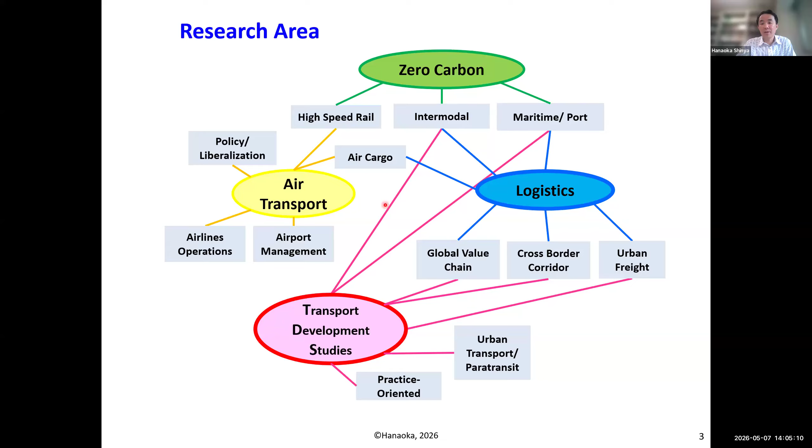My core research topic is logistics and air transport, but I also focus on transportation development studies, meaning developing countries' transport and logistics issues. Today's topic is between zero carbon policy and logistics for intermodal transport, which is research one of my previous master's students has done.

Going to the background: CO2 emissions from the transport sector in Japan are the second largest emission volume, following manufacturing. Manufacturing is top, with transportation accounting for around 20% of CO2 emissions. Among the transportation sector, around 55% is passenger transport, like personal vehicles, other passenger vehicles, passenger rail, and ships, and another 45% is cargo. In total, around 40% of transport emissions are from freight trucks, making trucks one of the major emission sources in transport in Japan.

In freight trucks, the Japanese government more than 20 years ago began considering a modal shift from trucks to freight rail, ships, or air. Air is actually a bit different, but they're mainly considering shifting trucks to rail and ships.

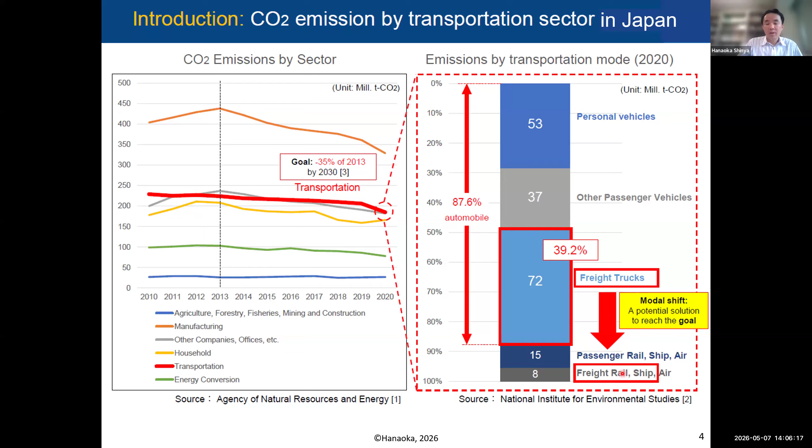Then the recent around 9 years, the statistics. So modal share freight transport in Japan uses two different indicators: tonnage and tonne-kilometers. Tonnage is more than 90%, around 91%, is truck. Railway, waterway, and airway are minor. Tonne-kilometer means about 1 ton transported how many kilometers in total.

By tonne-kilometer, truck is still the majority, but the percentage is around 55 to 57%. Waterway is normally used for longer distance freight transportation, so its share is around 38 to 40%. Railway is still not so popular at 4%, and airway is very negligible.

One interesting trend: tonnage is continuously decreasing, and tonne-kilometer is also decreasing. 2020 was the year of COVID-19, so of course there was a much decline. But after that, tonnage again kept continuously decreasing from 2021 to 2024, while tonne-kilometer has been stable.

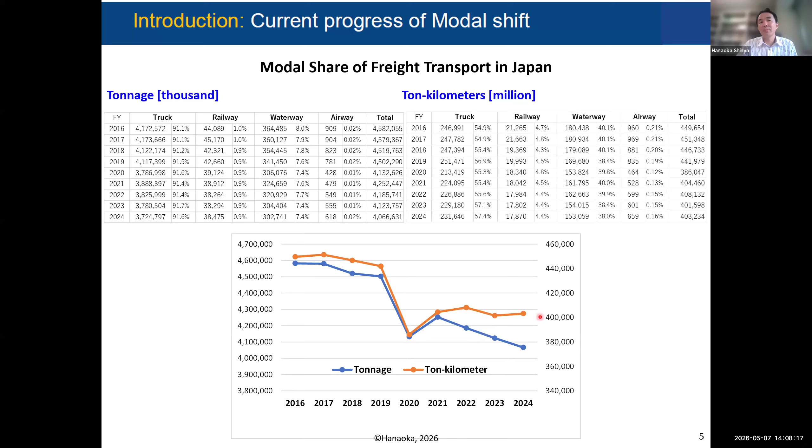Why does this happen? With more e-commerce, small package cargo is drastically increasing in Japan - small size, light cargo. That's why tonnage itself is decreasing, but tonne-kilometer stays stable because small cargo transported by truck over short distances is more frequent. Considering CO2 emissions, we should actually reduce tonne-kilometers, so it's still a serious problem from truck transport emissions.

Then what about the railway freight transport situation in Japan? For tonnage, JR Freight is the major operator, but other private railways also operate. The share of JR Freight is around 89% for container, but carload cargo like coal, limestone, cement, and petroleum - heavy bulk fuel - is different.

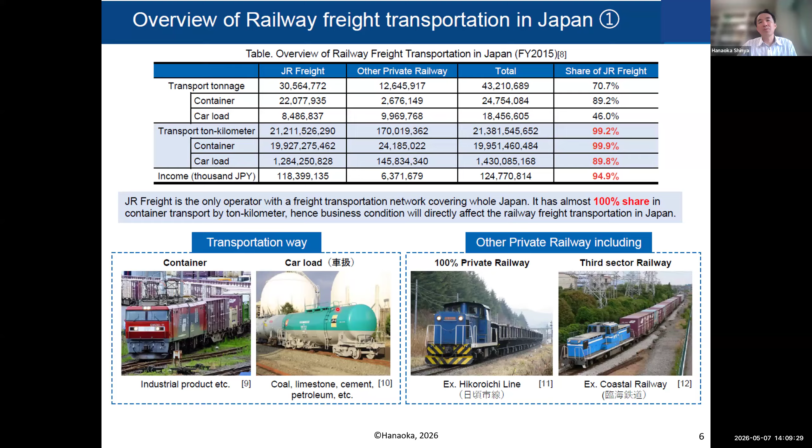That carload cargo can be operated by other private railways. However, on a tonne-kilometer basis, it's almost entirely operated by JR Freight. In some specific locations, for example the Hikoroichi line, they transport coal from a coal area to a factory over a very short distance. So there are some specific companies, but the majority is transported by JR Freight.

JR Freight itself has a problem with its management policy, and before that, also difficulty using services. In Japanese railways, schedules are rigid because passenger railway and cargo railway share the same infrastructure - there is almost no dedicated cargo railway infrastructure. That's why it's difficult to flexibly meet shipper demand, and there's increased risk of damage due to transfer stations or terminals.

Another problem is JR Freight's management policy - they have declining operating revenue. JR Freight has been trying to survive by reducing the scale of its business, becoming smaller and focusing only on urban areas, even though long distance routes connect urban areas. That's why the network scale has been declining, creating a mismatch between shipper needs and railway transportation.

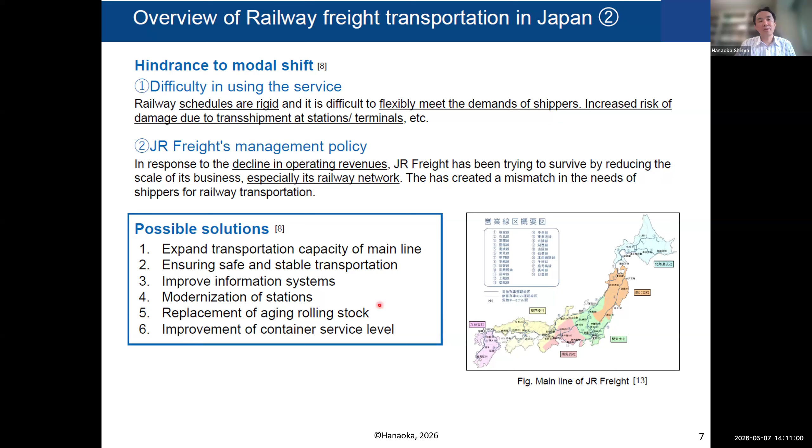The government has proposed some possible solutions: expand capacity, ensure safe and stable transportation, improve information systems, modernization of stations, and replace aging rolling stock and railway infrastructure, then improve container service level. But as shown in the previous slide, railway cargo share is still very low.

What about waterway freight transport? Japan is an island country, so freight transport using domestic sea routes is popular. There is a separation between liner cargo/liner vessel and tramper vessel. Tramper is like high volume monomaterial industry transport, for example iron ore.

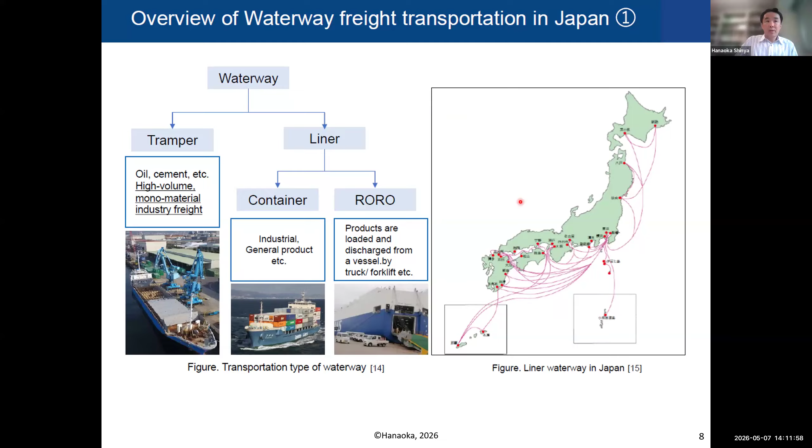For the liner case, container is popular, but actually Roll-on Roll-off (Ro-Ro) shipment is also very popular because they don't need special facilities - vehicles can directly enter the vessel. So Ro-Ro is popular because in the Japanese islands it connects many routes. This is one example of liner waterway transport in Japan.

What about the hindrances or bottlenecks to modal shift? One is competitiveness. Waterway transport is low cost, but on Japanese highways and expressways at nighttime there is a much bigger discount for highway charges. That's why shippers or truck companies still continue to use truck transportation from midnight 0 a.m. until 5 a.m., when they can get much discounted prices. That is one aspect of cost competitiveness, along with seaway, which has a reduction in operating tax.

And then there is also a large number of small businesses.

The industry is dominated by small scale businesses in the shipping company sector. In overseas vessel container services, there are three big shipping companies in Japan, but domestic shipping companies are very small. That's why the number of operators is decreasing year by year due to the extremely weak management base with very little internal accumulation of capital.

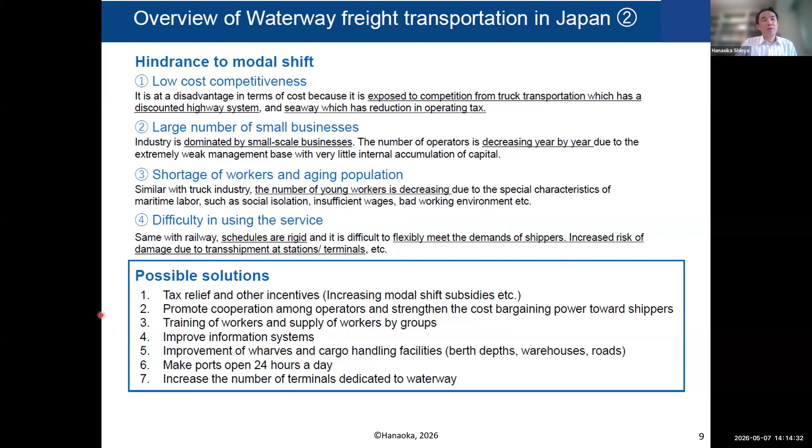In this research, we consider how to reduce CO2 emissions in the transportation sector, following Japanese government policy, because the government set a goal of achieving carbon neutrality by 2050 by using political measures, regulation, and incentives.

So in this research, we can formulate decarbonization policies incorporating a generalized cost function of shipper mode choice, and also a national scale transport network model, and origin-destination analysis for domestic trade in Japan. Then we simulate the overall impact of decarbonization policies on freight volumes and CO2 emission, and then we can evaluate these results.

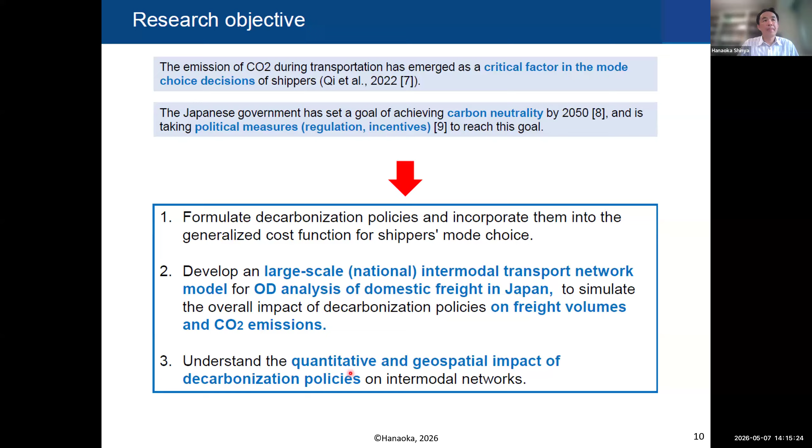This is a very technical matter, so I won't explain the detail, but one point is how to make the average cost. Cost is the main part, the average cost, but we can also consider variance because cost is not always fixed. There are changes in negotiation, that's why the variance of the route cost is also considered.

The cost function has a link for each connection. Link means a connection to a node in the road network or railway network. Node means the station, or in the road case an intersection, and in the inland waterway case a port. So the connection is the link.

In the link function, we can add the CO2 emission cost to the original formulation, which is from another paper. The C means the shipper's consciousness parameter, how conscious shippers are about reducing CO2 emission, because normally shippers just consider cost and time only.

But now, in the current situation, shippers should also consider reducing CO2 emission. That's why we added this consciousness parameter here, along with CO2 emission per ton, per distance, and also price. Price can also flexibly consider the CO2 emission per ton.

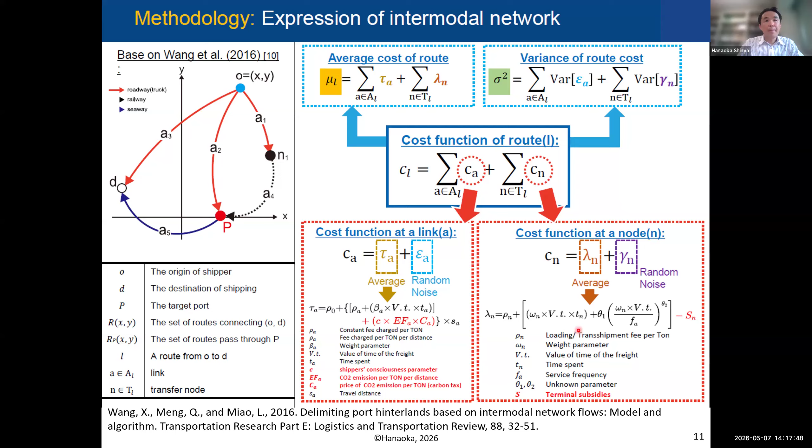For one part of the accuracy consideration, we are using discretization across all of the territory in Japan. Each dot is a shipper's location, and the shipper's location connects to the destination, shown using the roadway, waterway, or railway link.

Using the average cost function and the variance-covariance matrix, we apply a multivariate normal distribution to show port choice probability and the mode choice results. Then finally, we can estimate freight transport by using Monte Carlo simulation.

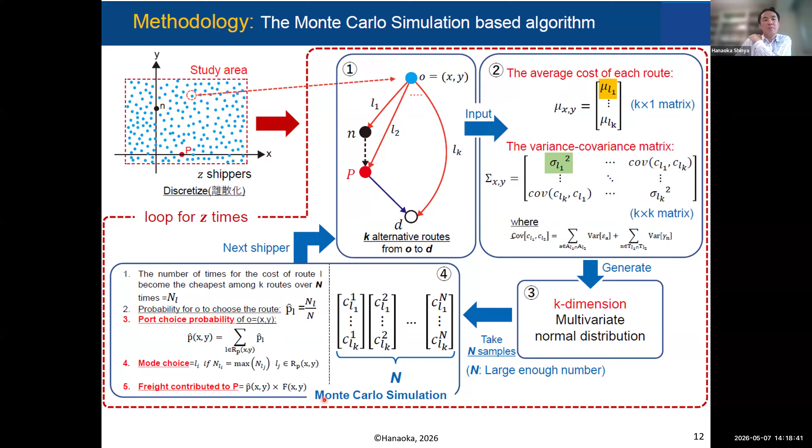One scientific point: if we want to go from an origin to, say, Osaka and Tokyo destinations, they may overlap on the same road. In that case, if we calculate simply, the duplicated area causes an overestimation of the variance. So the variance-covariance structure can reduce such overlapping consideration.

That's why our model is more accurate, giving a more accurate estimation of the transportation cost. This is the scientific characteristic of the model.

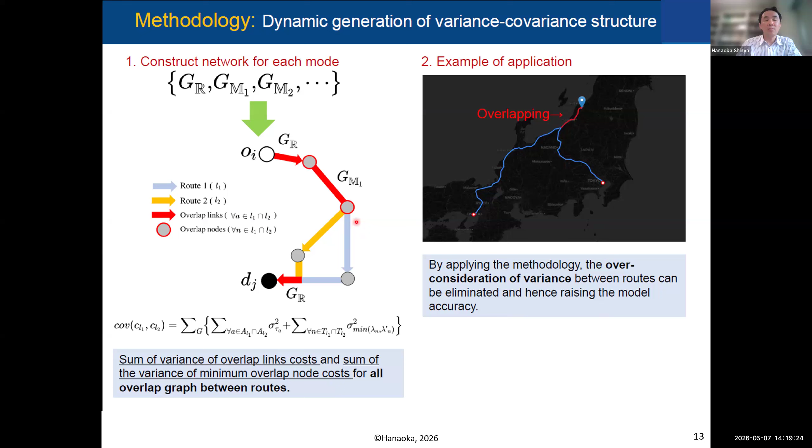Road network, railway network, and waterway network can be made from our existing database. For the waterway particularly, we are separating the types into ro-ro, ferry, container, and tramp, because they have different routes in the sea.

Then we have three scenarios to consider for reducing CO2 emissions. The first scenario is shipper's consciousness, just 5 times the current situation. That 5 was actually arbitrarily decided, to see how we can change shipper's consciousness.

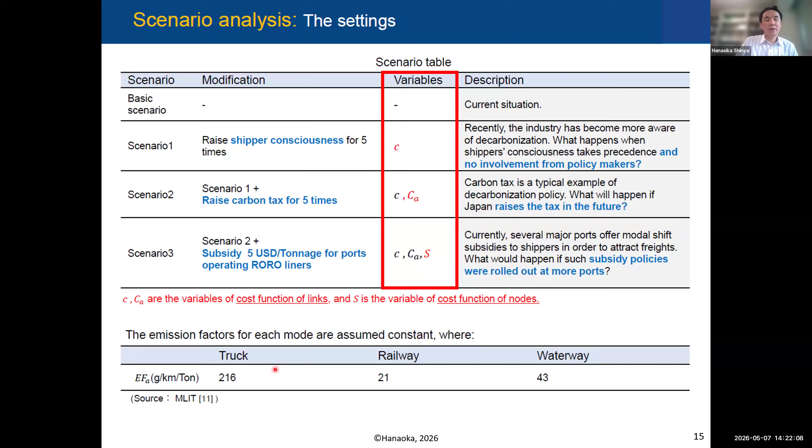So then we can estimate the involvement of policy makers and how Japan raises the tax in the future, and we can also discuss whether subsidy policy will roll out to more ports. The emission factor of each of the 3 modes—truck, railway, and waterway—follows the decision of the Ministry of Land, Infrastructure, Transport and Tourism.

Here are the results for modal share. Scenario 1's modal share has not changed much from the basic scenario. There is just a minor slight change, with reduced truck and increased railway and tramp, but almost no impact.

Then what about scenario 2? Raising the carbon tax 5 times, the railway share is increasing and truck is decreasing, shifting from truck to railway. In scenario 3, the subsidy to ro-ro liners causes ro-ro share to increase, shifting cargo from truck to ro-ro, while keeping the carbon tax effect, so railway also has a high share, but the highest impact is the increase in ro-ro.

But across these 3 scenarios, there is clearly only a 2% decrease from the original truck share. So while our calculation is very accurate, this means the impact of this kind of policy is very minor.

This is the modal share volume. Then how much does this reduce CO2 emissions? For the CO2 emission case, the emission factor is different, so it has more impact than the modal shift itself.

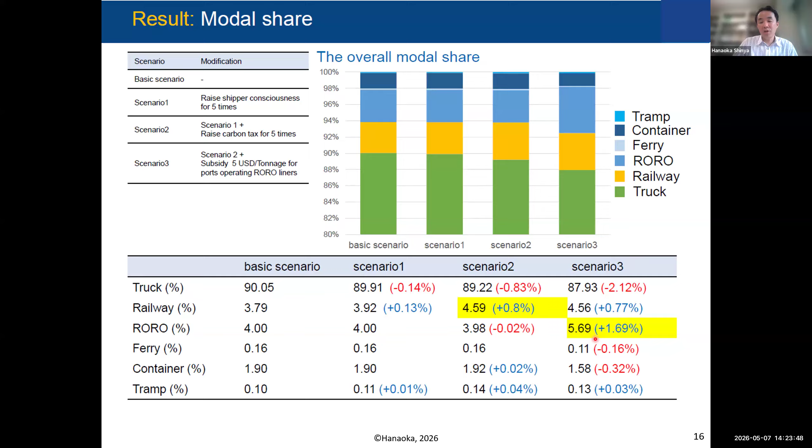The modal shift is only a 2% change, but in scenario 3 there is a 6.5% reduction from the baseline scenario. This is a kind of significant decrease, since it's more than 5%.

This means that with the subsidy to ro-ro, waterway emissions increase by more than 10%, but since the emission factor for truck is much higher than for waterway, the total emission reduction is very high compared with the basic scenario.

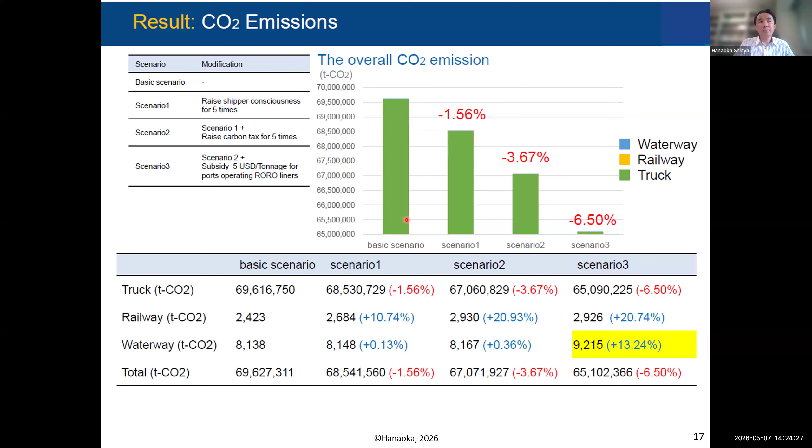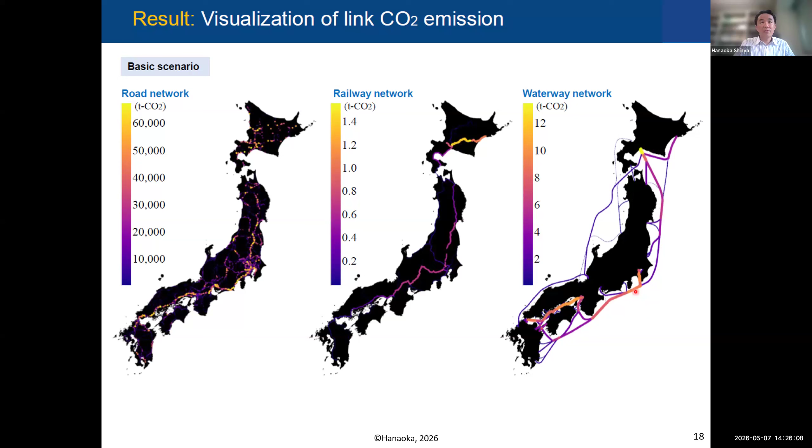The results show very few increases in shippers' consciousness, which is insufficient. A carbon tax increase can lead to increased utilization of railways, but with inadequate strength for the waterway sector. Strong incentives for waterways are necessary. But modal shift alone is not a sufficient reduction measure, since road transport accounts for the majority of emissions.

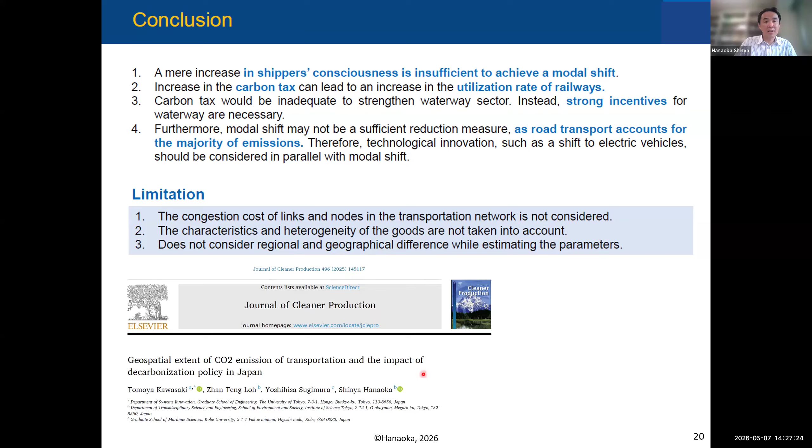So the government considers another policy. Before going to the next topic, if you're interested in this, we already published a paper on it in the Journal of Cleaner Production, published just last year. Here, the Japanese government considers the vision of the Autoflow Road, saying 'crisis into opportunities through Autoflow Road.' This is copied from the government material.

Before I explain about the Autoflow Road, I will introduce a YouTube video. The voice is Japanese, but the text can be shown in English. Okay, so we can start.

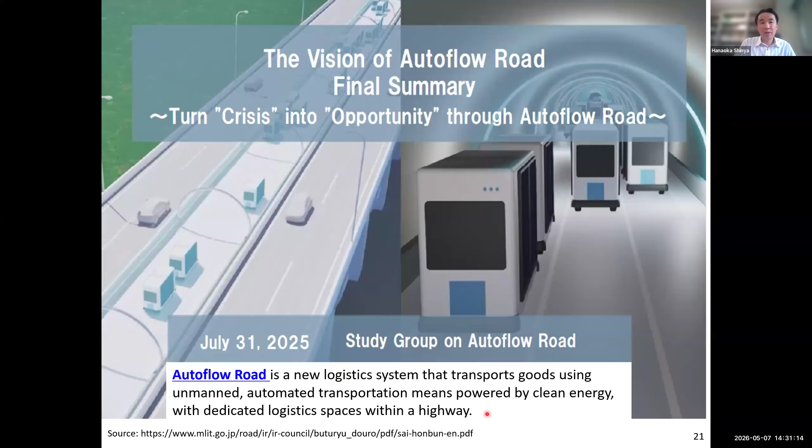As the video explained, Japan seriously faces a truck driver shortage. The peak time for truck drivers was more than 20 years ago, around 1995, and since then truck drivers have been deficient. We call this the 2024 problem, because the Japanese government strictly regulates overworking time—not only for truck drivers but all workers. The overworking time limit is 960 hours a year, so truck drivers cannot drive overtime. This means the number of drivers is decreasing, and driving time is also decreasing. This is one of the backgrounds.

The second background, as already shown, is that around 18.5% of emissions in Japan come from this sector, and freight transport is 45% of that. So how can freight transport emissions be reduced, especially from trucks? This is another issue. Also, as mentioned, tonne-kilometers remain stable because small volume, high frequency shipment has drastically increased compared to the past. Shipment cargo volume itself is very small, but the number of shipments has drastically increased. So how can we adapt to this trend in cargo?

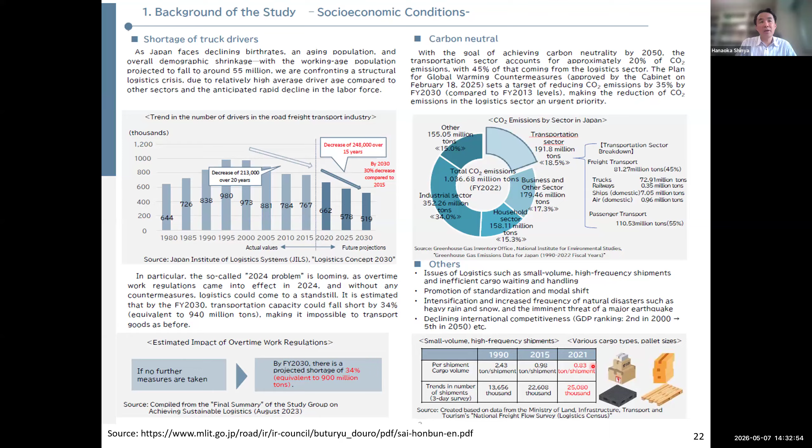The Autoflow Road was proposed by MLIT, our Ministry of Land, Infrastructure, Transport and Tourism, two years ago in February 2024. This concept creates dedicated road space to transport goods using unmanned automated transportation means and digital technology. Hence the name Autoflow Road—utilizing road space and digital technology to achieve unmanned automated transport.

One issue is how to package the cargo. They plan to use very small size packages, making a palletized image of the cargo so small volume, high frequency shipments can use this pallet, making the cargo easier to handle. The target area for the Autoflow Road is from Tokyo to Osaka, a high density cargo area using the expressway. The Japanese government aims to implement this new system by 2030, within the next four years.

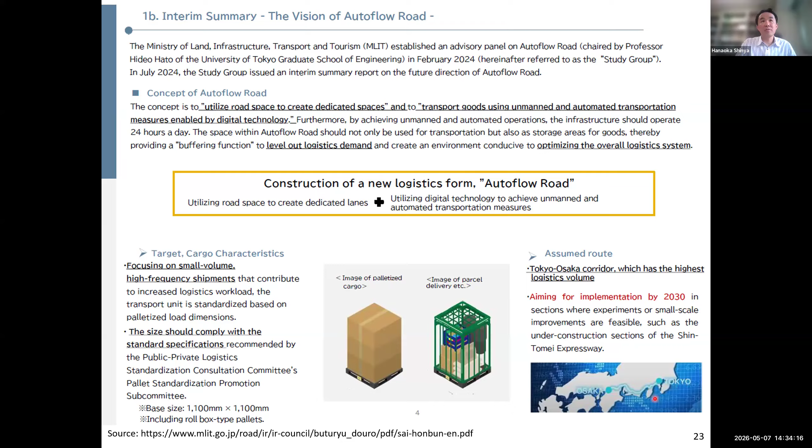Last year, they established a consortium with three committees: a business model subcommittee, an operation subcommittee, and an infrastructure subcommittee. The commercial aspect is very important, because otherwise private companies will not invest in such new technology. So the business model subcommittee considers how to invite private companies to invest in this new technology.

The operational subcommittee considers how to set up demonstration experiments, particularly for technological aspects. The infrastructure subcommittee considers how to improve the expressway, since this will be built on or by expanding the existing expressway infrastructure. That's why they need this subcommittee. These three committees were established, and from last year to this year they have been discussing several experiments and phases to realize this new system.

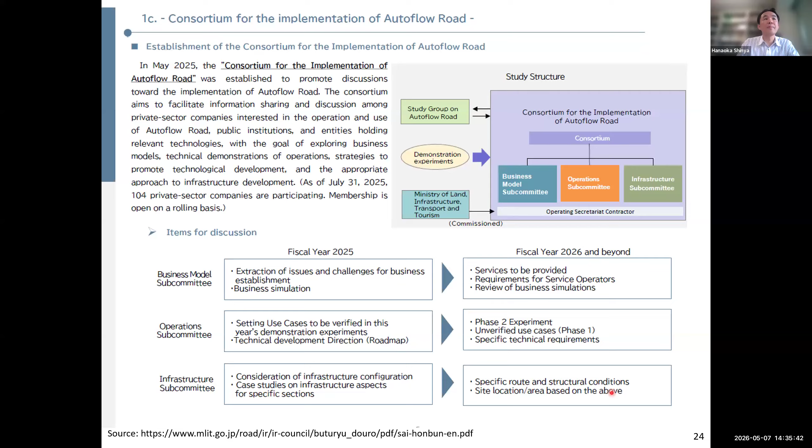Here are many texts, but what they say is about the role of the Autoflow Road. One part is optimization for the entire logistics system, standardization and automation. Standardization means palletized and flexible transportation planning, so they don't need truck drivers as much. That's why 24/7 operation of the Autoflow Road is possible.

Another aim of transforming business practice is improving working conditions. How can they reduce truck drivers' burden? This is also about optimizing the entire logistics system, with seamless integration considering not only different transport modes but also truck transportation, and another government project: truck platooning.

Truck platooning means 3 or 4 autonomous trucks connected in one platoon. The first truck has a driver, but the second, third, and fourth trucks have no driver. This is being discussed in parallel, and truck platooning also collaborates with the autonomous Autoflow Road.

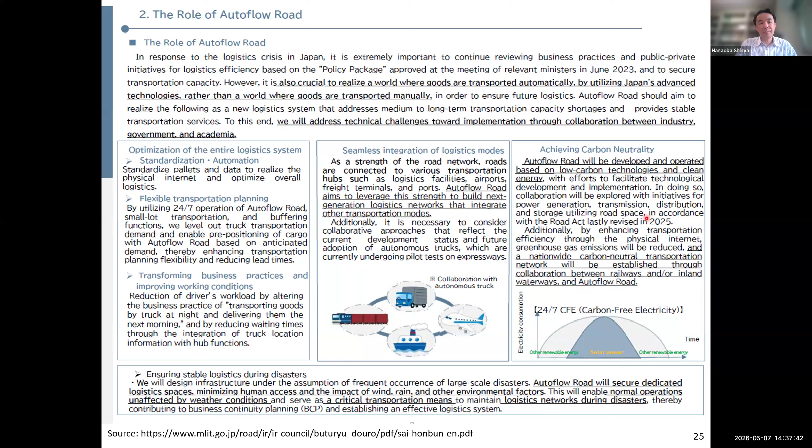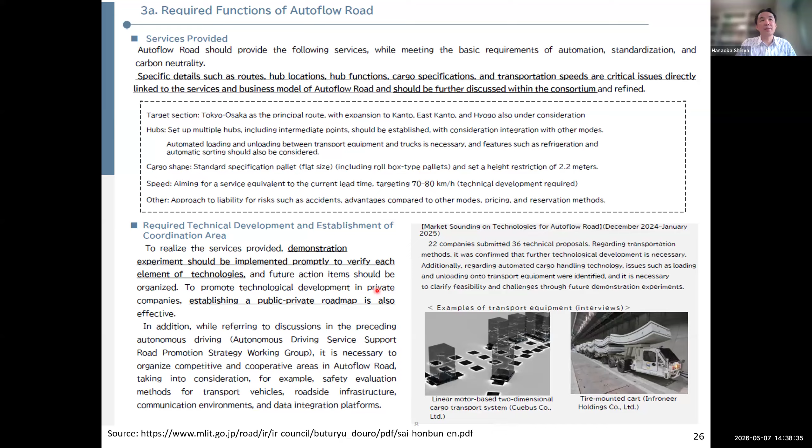They have already received many proposals from private companies on how they can use this system, such as tire-mounted carts or linear motor based two-dimensional cargo systems from a few private companies. On the infrastructure side, as mentioned, they need several functions like interchange, junctions, service areas, and parking areas, plus relocation, underground utilization, and changes to shoulder slopes.

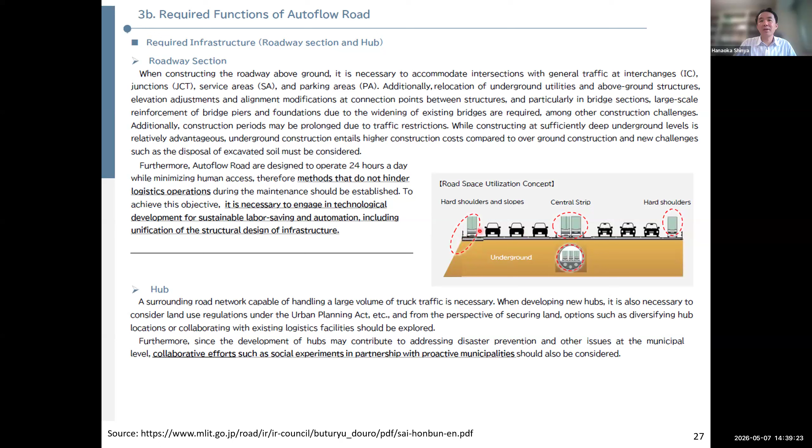The road space they'll use is the existing expressway from Tokyo to Osaka. How can they use this space, given that existing cars are already driving there? In the video they show only the central area, but they're also considering the edge areas, the right-hand side and left-hand side, as possible space to use.

Regarding the effects of the Autoflow Road, the numbers differ slightly from the video, but in the slide they say truck drivers' working hours would be reduced by 20,000 to 57,000 person-days. CO2 emission reduction would also be 2.4 to 6.4 million tons of CO2 per year, showing how big a reduction this is compared to the existing situation.

For the capacity of Autoflow, under estimated conditions of around 500 kilometers, they can finally estimate this kind of achievement.

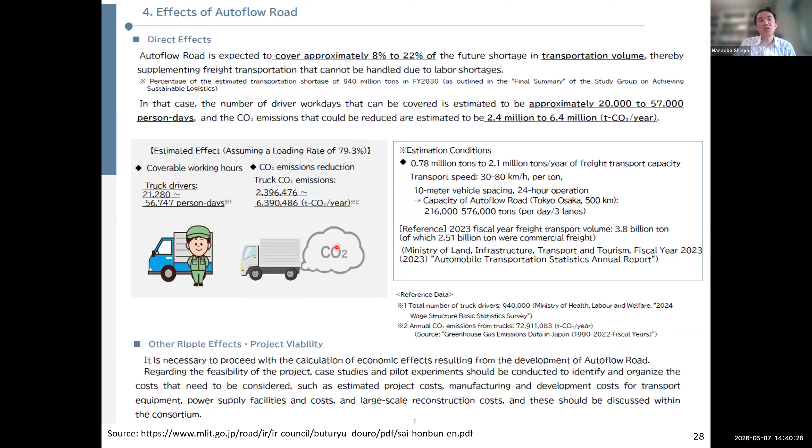Of course, they also have risks on the construction side: high cost, cost uncertainty, and funding risk, since it's not fully supported by the government. They also expect private funding, so funding risk is included, along with operational uncertainty of demand. Even though the government promotes it, cargo transport is really a private operation, which is why attracting shippers and transport operators to this system matters. Uncertainty of demand is also a problem, along with operational risk and an unpredictable business model.

Maintenance issues like deterioration over time, road funding, damage, and possession issues are also considered risks.